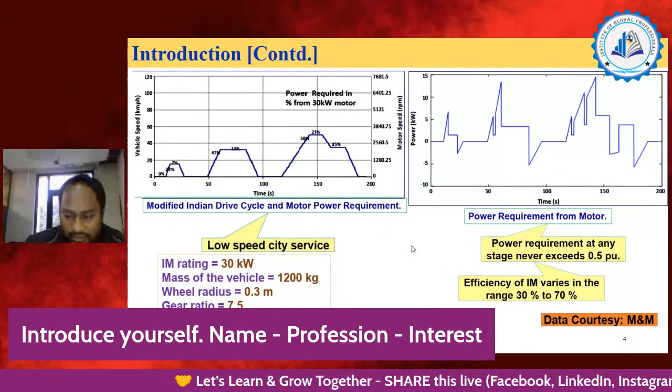All this data is practically analyzed from Mahindra Mahindra EVs. They have provided these graphs. So, induction motor, if operated at rated condition, will provide approximately 80 to 85% efficiency.

At maximum we can get 80 to 85% for a well-designed induction motor, and this efficiency will decrease when it's operated at derated condition or light load conditions. At that time, power factor is also very poor, approximately 0.1 to 0.4 in this range.

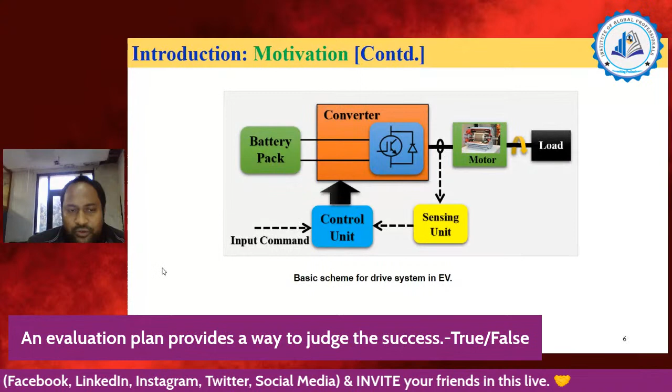For such cases, let's talk about the efficiency of a converter. The converter efficiency is about 95% to 98%. But let's say the machine is operated at rated load, then the efficiency of the induction motor is about 80 to 85%, with the motor also operating at rated speed. Then the overall efficiency of the whole drive system, we can observe, is about 70 to 75%. This is a pretty good overall efficiency of the drive system.

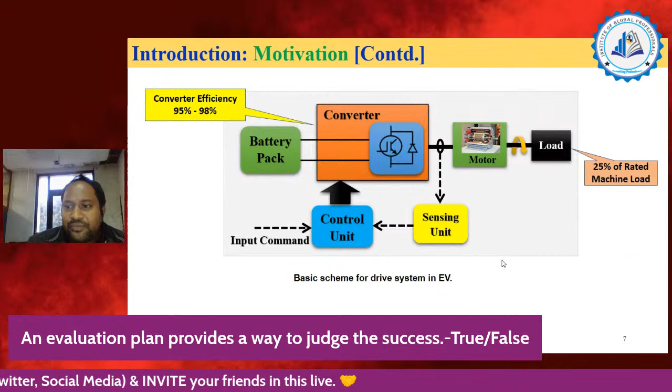But in the next scenario, now the motor is operated at 25% load, and speed also reduces to 25% of rated speed. In that condition, efficiency of the induction motor is 30 to 35%, and overall efficiency is about 25% to 28%. So this is very low overall efficiency that we achieve at low speed and low operating power conditions.

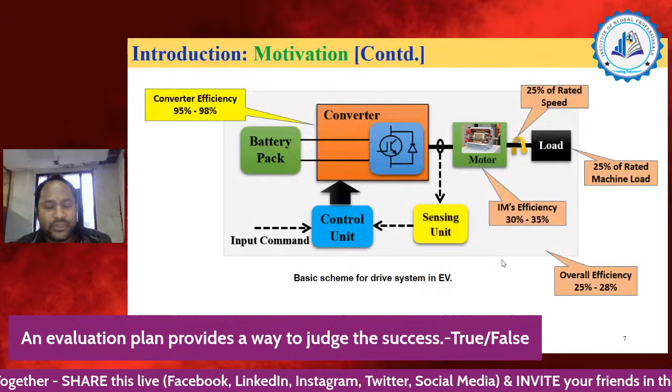So what we can see is that in that induction motor, core loss is the primary component responsible for poor efficiency of the overall drive system when operated at light load conditions. This hard reality demands efficiency improvement of such drives used for electric vehicle applications. This motivates us because if we improve the efficiency by even a very minor level, it will lead to a significant impact on global energy. If we improve efficiency by just 1%, that is enough for these cases. So this is the basic focal point of today's discussion.

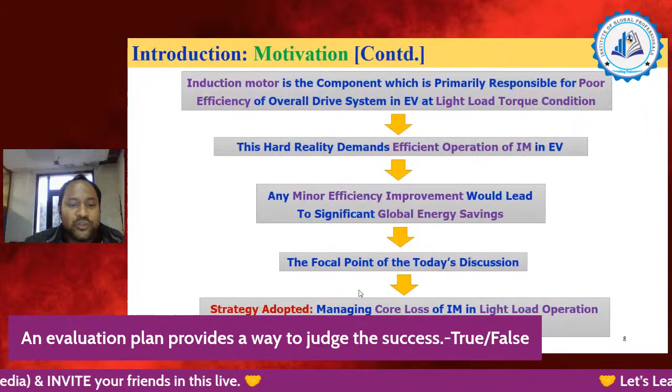So the strategy I am going to adopt to improve the efficiency of an induction motor is core loss minimization, by minimizing the core loss particularly at light load condition, by selecting the optimum flux of an induction motor.

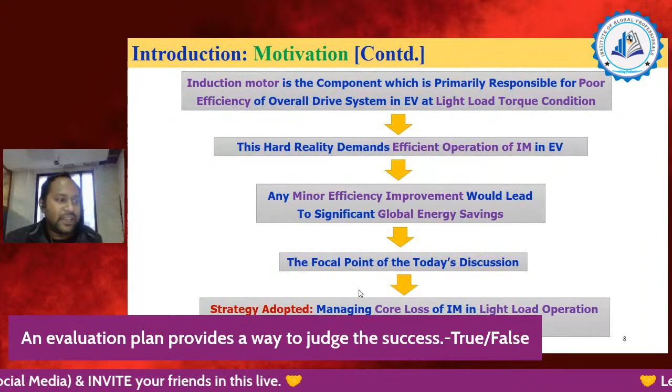So what we can say is that the average full load efficiency of a well-designed induction motor is 80 to 85%, and this degrades further when operated at light load condition. In fact, motors are subject to operating at light load condition for the majority of their service life. Besides, induction motors are also adapted in electric vehicles and hybrid electric vehicles nowadays. However, there are several advantages of induction motors, but their moderate efficiency puts a serious challenge for adaptation in EV and HEV applications over permanent magnet motors. In fact, battery usage to cater to losses becomes significant for induction motor drives.

This hard reality basically demands efficient operation of induction motor drives, and this is the focal point of the whole presentation. So I will primarily develop an efficiency optimization strategy for induction motor drives, which will offer high efficiency at light load conditions.

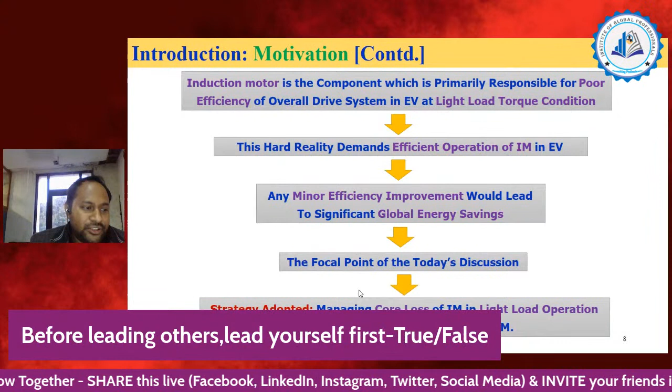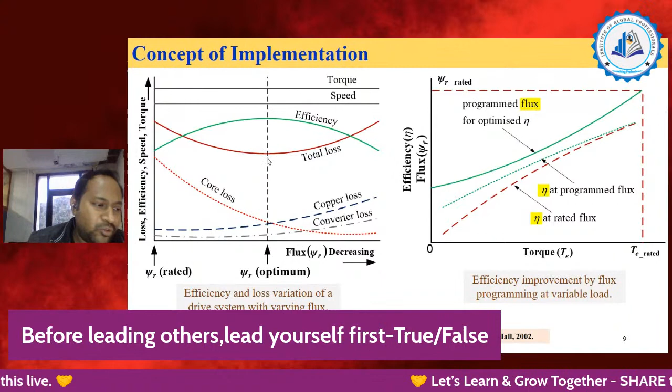So to get the maximum efficiency, the drive should operate at optimum flux corresponding to a particular load or loading condition. So here, if we reduce this flux, I observe that at this particular condition the overall losses reduce, meaning total losses of the machine get reduced, and at that time efficiency is improved and is maximum.

Now if I further reduce the core loss by reducing the flux further, we observe that total loss again increases and efficiency decreases. So we need to arrive at a particular point where the efficiency is maximum. That corresponds to the optimum flux point. So we need to achieve the optimum flux point so that we can get the maximum efficiency from the drive.

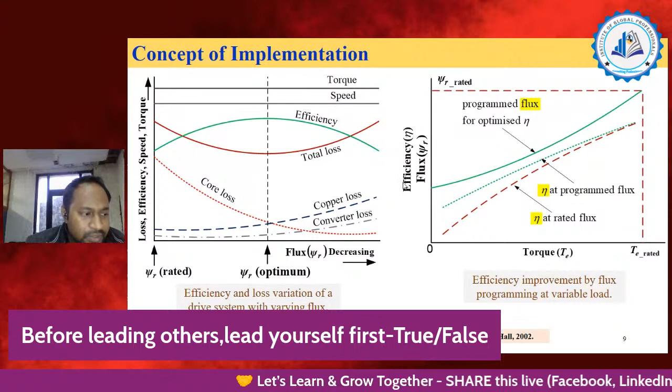The right side of the curve basically represents the torque versus efficiency and fluxes. This is the rated flux condition. What is the efficiency? At the rated flux condition, this is the efficiency.

As we know, as the load is increased, that means towards the rated condition, the efficiency is very high, and at low load or derated conditions the efficiency is very low.

So if I program my machine, or the flux, in such a way that we can program the flux, the machine is now operated at optimum flux condition at different loading conditions. This dotted green color curve shows the programmed flux. That means when the machine is operated at the optimum flux condition, we can achieve improved efficiency.

This is the significance of using efficiency optimization, or energy efficiency algorithm, for improving the efficiency of the induction motor drive. We can observe from this curve that at the optimum flux point, the efficiency is significantly improved.

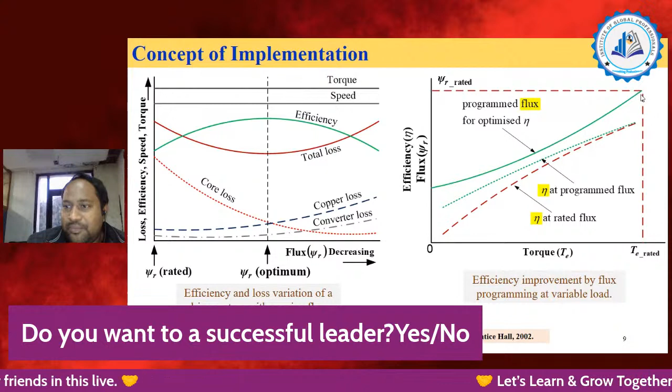So these are the background of efficiency optimization strategy. Different efficiency optimization strategies can be found in literature, and these can be categorized as offline strategy and online or real-time strategy. The real-time strategy is further classified as LMC, that is loss model control, SC, that is search control, and hybrid control.

Hybrid control is basically a combination of loss model control and search control. Both strategies are combined to make a hybrid technology.

This technique, LMC, is dependent on the machine parameters, because to calculate the machine loss it uses machine parameters like stator resistance, rotor resistance, inductance, and other parameters, and speed as well.

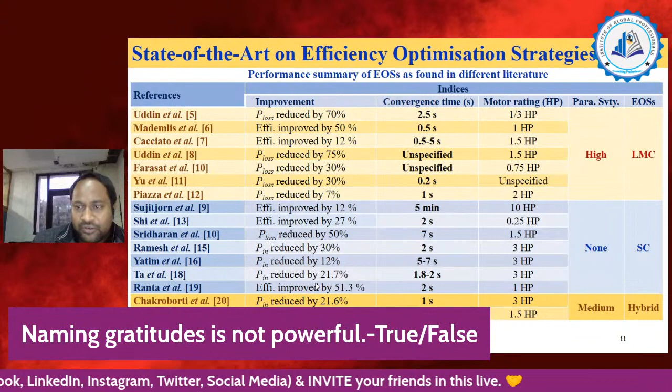So, what are the scope and challenges for the implementation of the efficiency optimization scheme? These are a few issues based on the literature survey. Among the different issues we have found, EOS, efficiency optimization strategy, is quite complex for implementation.

So this is the technique I implemented in induction motor drive to improve the efficiency of induction motor drive. Here I have used a modified adaptive quadratic interpolation technique. This is a mathematical tool to improve the efficiency. The quadratic interpolation is a very useful and efficient method for solving the optimization problem.

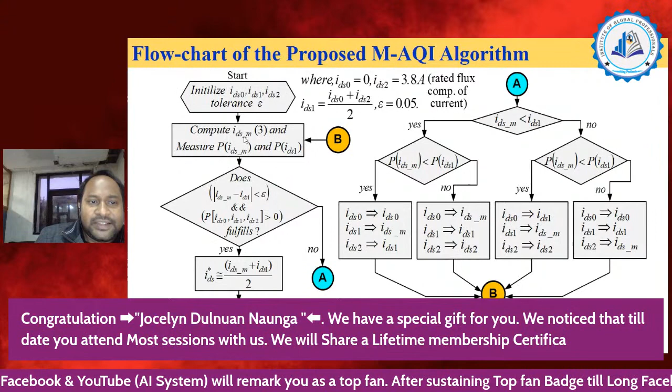So we have initial 3 points: IDS 0, IDS 1, and IDS 2, and I take a tolerance limit, that is epsilon is 0.05. Going back to the previous slide, if IDS M and IDS 1 lie within this tolerance limit or tolerance band, 0.05, then we can say we reach the optimum value. So we will compute first the IDS M using the equation shown in the previous slide, from which we can compute the value of IDS M.

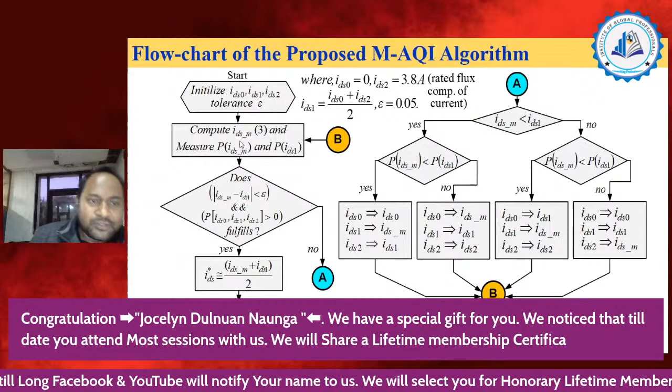So we will also measure the minimum value and the input power of the machine. That means what is the input power for that particular flux condition, and what is the input power at the rated condition or previous cases.

Initially the machine was operated at rated condition, represented by IDS2, and the minimum flux condition is represented here. The power at the minimum flux condition is represented by PIDSM.

So basically we will measure power at different instances and compare these two powers, checking whether the power is going in the lower direction or towards the upper direction. If power reduces, that means towards the minimization direction, then it's fine. If power increases upward, then we need to again compute the flux value.

So we will start like that and check whether these differences lie within the tolerance limit, and whether the sufficient condition is fulfilled. If fulfilled, that means the second derivative of that particular polynomial curve is greater than 0, positive, then we can stop the iteration. If it's not fulfilled, then again we move for the iteration.

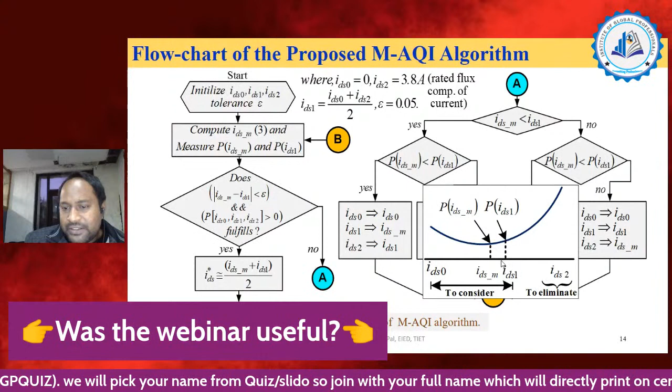I will take one example. Let's say this is a particular case where IDS0 is the minimum value on this side, IDS2 is here, IDS1 is here, and IDSM is here. So here we can observe a particular case: I have considered these two cases where the flux value IDSM is less than IDS1, and the corresponding functional value PIDSM is also less than PIDS1.

So in this case, this is also true. From the curve it can be observed these two conditions are fulfilled, so this curve looks something like that. We will eliminate this part, from IDS1 to IDS2, this part of the curve will be eliminated, and we will focus from IDS0 to IDS1 in this particular area.

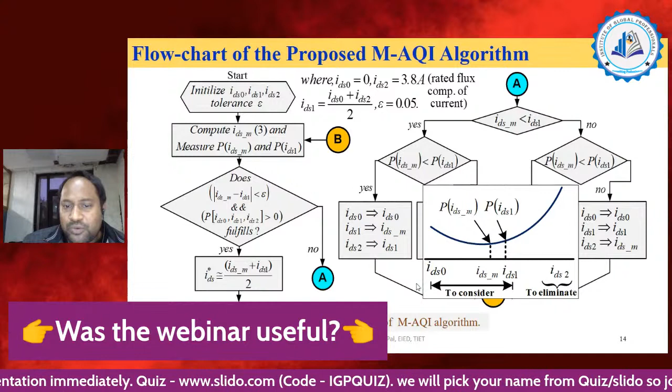Because in this area the minimum value will lie, we will modify these values IDS0, IDS1 and IDS2 with this information, and we will continue these iterations until they fulfill these conditions.

So basically what happens in the line search technique: the initial interval is given and we run the adaptive quadratic interpolation, and at each iteration the interval size reduces. That means we eliminate a portion of the curve or portion of the interval in each iteration, and the optimum step of interval should be very small, so that it is accepted and we can say we get the minimum value. So this is the whole thing.

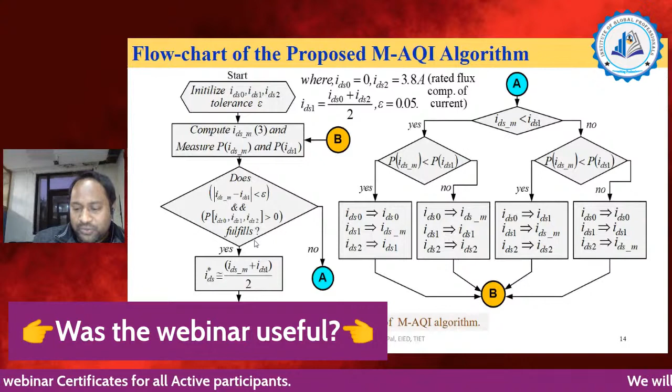This was developed in MATLAB, and I have implemented it in an induction motor drive, and I will show the scheme of the induction motor drive here.

So this is the whole scheme, the field-oriented control scheme of induction motor drive with efficiency optimization strategy for EV applications, electric vehicle applications.

A typical indirect field-oriented control of induction motor drive used in EV is shown in this block diagram form. The squirrel cage induction motor is fed by a voltage source inverter, that is VSI, and the control scheme is developed in synchronously rotating reference frame with two current sensors, IA and IB, used to sense the line currents.

The efficiency optimization strategy is implemented in the flux loop of the field-oriented control structure, and it decides the value of the flux component of current, which we use for further processing of the scheme.

So basically this efficiency optimization strategy is integrated in the flux loop to decide the optimum value of the flux component of current based on the input power requirement.

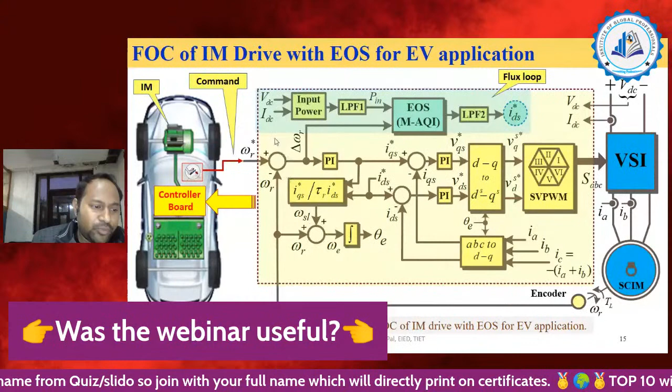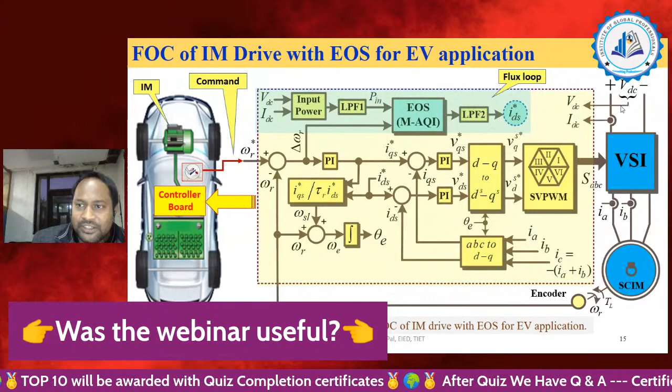So we can measure the input power from this converter input, that is the voltage at the converter, VDC, and current, IDC. So whatever the input of this converter, we can measure this and get the input power of the converter, and that I am going to use for implementation of this efficiency optimization strategy.

And here another feedback is coming, that is delta omega r, the speed difference of reference speed and feedback speed. This del omega r is the speed difference that also needs to be fed back for this efficiency optimization strategy, and this is required for when there is a speed change in the induction motor.

In the machine there is a speed change. So when there is a speed change and this difference is very large, the efficiency optimization strategy will decide to set only the rated flux. At that particular transient moment, the machine will operate at rated flux conditions. Once the machine goes into steady state, the efficiency optimization strategy is automatically applied to the machine.

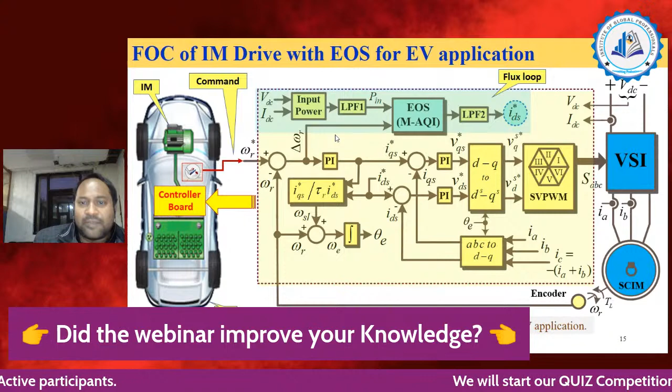So that's why we need this speed information. Let's say for these cases, when the speed difference lies within 1 radian per second, then we can say the machine is in steady state. Now we can apply the efficiency optimization strategy, and this strategy will automatically apply - we need not worry about application of this scheme. It is an automatic application process.

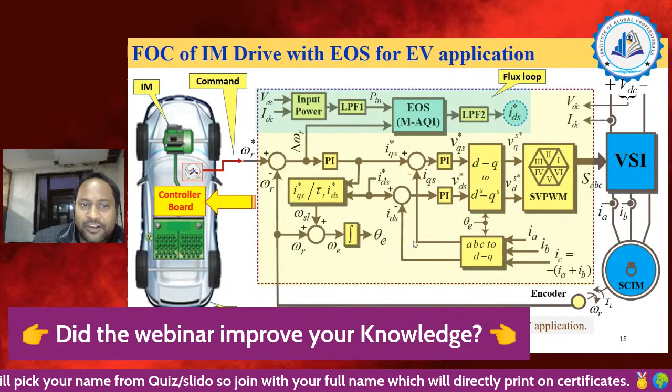So in this way, this will continue, and it will search for the minimum input power requirement corresponding to the optimum flux. And when it is the optimum value of the flux, the machine input will be minimum, and that gives the minimum losses of the machine, hence efficiency of the machine will improve. In that particular case we can say efficiency is maximum.

So here we can see an encoder is used for speed measurement purpose, and this is actually closed loop operation of the induction motor drive. This scheme is developed in MATLAB Simulink, and later it is implemented in hardware as well.

So here I can show the machine parameters. What are the machine parameters and controller parameters that we have used in this scheme? The induction motor we use is a 2.2 kilowatt induction motor. Its rated torque is 14 Newton meter. These are the voltage rating and frequency level. Number of poles is 4, and these are the other parameters - magnetizing inductance, stator and rotor inductance, stator rotor resistances, rotor inertia, and all these things.

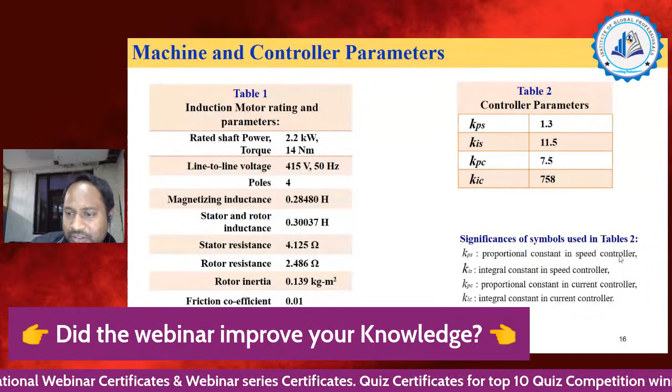And these are the controller parameters, basically PI controller, what I have used for these cases in implementing this field oriented control. So these PI control values are shown over here. KPS is speed control, and KIC represents the current integral control. So these are symbolically represented over here.

So now we'll focus on some results. These results are obtained from MATLAB simulations, and let's say a drive is operated at particular conditions. I have already mentioned that the induction motor's efficiency is poor when it's operated at light load conditions. So here all the results are presented at light load conditions, and we'll see how much efficiency is improved in these cases.

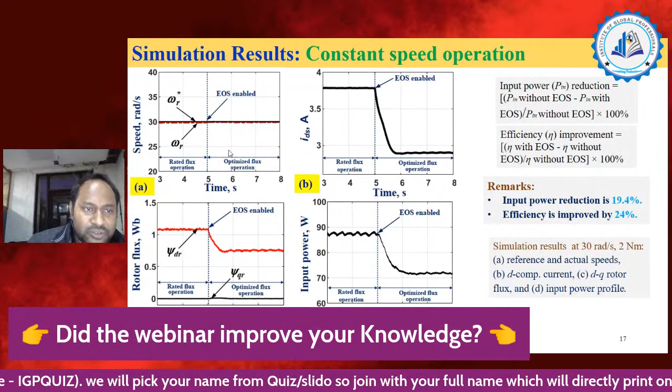Let's say for the first 5 seconds it's operated at rated flux condition, and at 5 seconds I have enforced the efficiency optimization strategy at this point. So after 5 seconds it shows the machine operated at optimized flux conditions. What would be the rotor flux, stator flux, stator current, and input power - these are shown in the other curves B, C, and D. So figure A makes it quite clear that the speed tracking performance is quite nice and smooth.

Throughout the operations, figure B shows the flux component of stator current. Initially during rated operation, the flux value is 3.8. When efficiency optimization is enabled, the flux component of current gets reduced and settles at an optimized value.

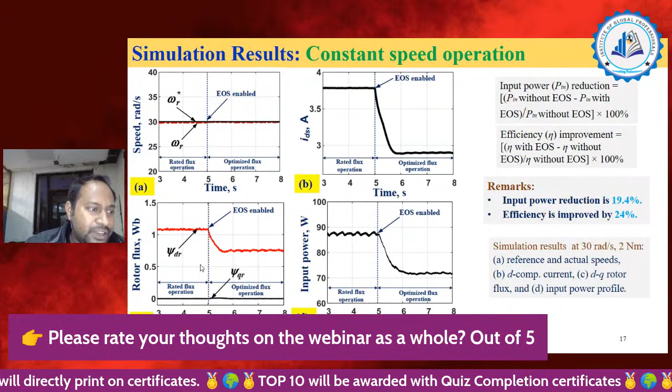It shows the corresponding rotor flux and input power as well. Figure C demonstrates the rotor flux, and here the rotor flux orientation is perfect throughout the operations. As the flux component of current is reduced, the flux also gets reduced. Once the flux gets reduced, the machine input power gets reduced.

This was the input power before the optimization algorithm is activated. Once the optimization algorithm is activated at 5 seconds, the flux gets reduced, therefore the input power also gets reduced and settles at a low value. So here we can achieve input power reduction of about 19.4%, and efficiency is improved by 24%.

So this is one result, for a constant speed operation of an induction motor drive, which is used in EV. These basically show that flux reduces and the corresponding input power reduces as well.

The second simulation result I'm going to show is the vehicle drive cycle. This is one modified Indian vehicle drive cycle. Figure A shows the speed tracking performance, and figure B shows the corresponding input power.

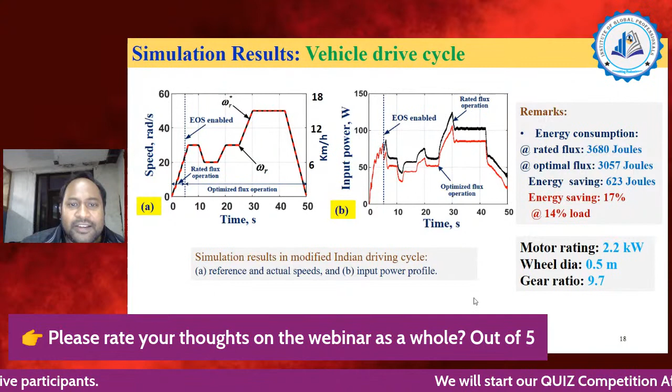So here we can observe from this analysis the efficiency saving - that means energy saving is 17% for say 45 seconds of duration. We have an energy saving of 17%, and this is a good saving for only 45 seconds.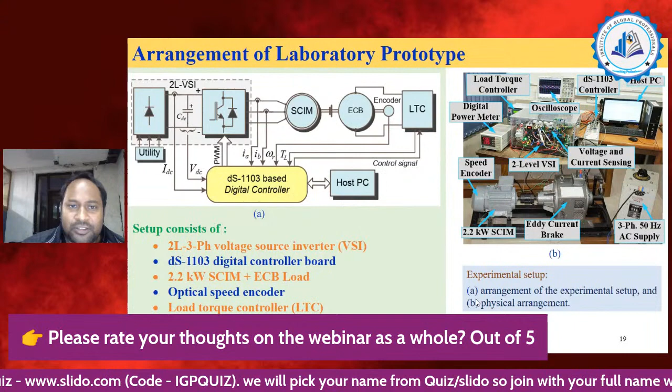Now, I have tried to implement all these things in a hardware setup as well, for validation of the scheme. So whatever we studied in MATLAB, I implemented on a real-time basis. Here's a brief discussion of the hardware setup developed in the laboratory, shown here.

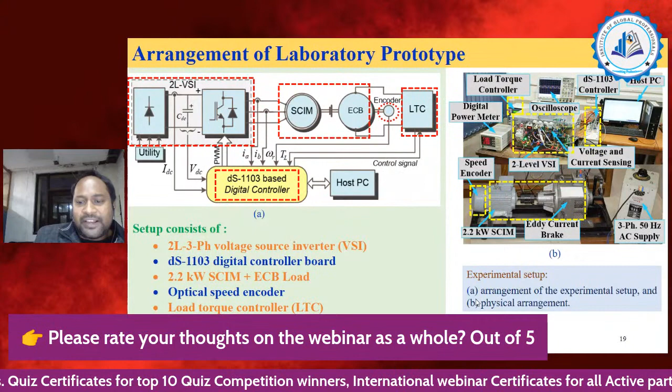This setup is developed in laboratory and consists of a two-level voltage source inverter, a DS1103 digital controller, and a 2.2 kilowatt induction motor with eddy current brake load. Figure A shows the schematic diagram, and figure B shows the physical arrangement of the laboratory prototype.

One of the major components of the setup is the voltage source inverter. This voltage source inverter has a power circuit card, gate driver card, and signal conditioning card. There is a current sensor and voltage sensor, all inside this two-level voltage source inverter module.

This module is designed and fabricated in the laboratory specially for the validation of this work, and we emphasized cost effectiveness. I will show different parts of this voltage source inverter one by one in the later slides.

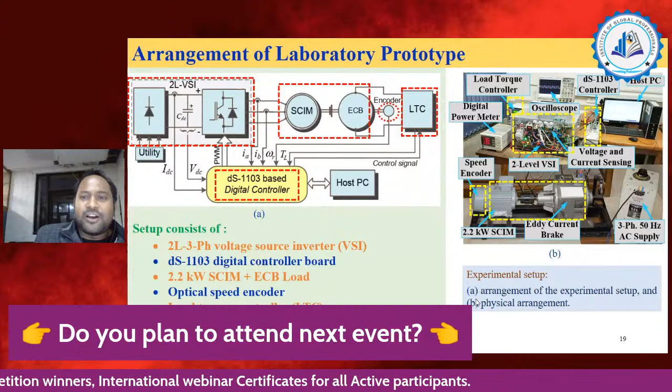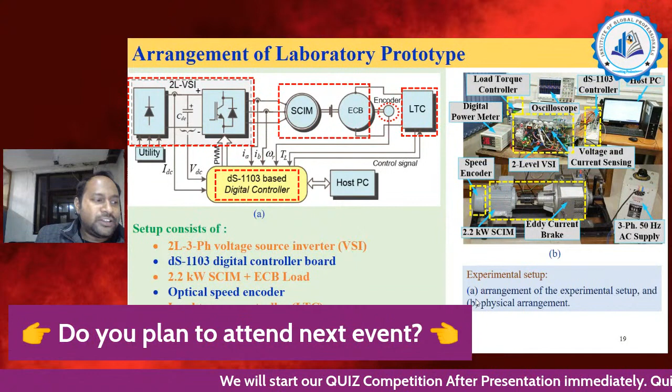All the PCBs are designed with the help of Proteus software, that is Proteus 8.9, and manufactured by JLC PCB, a Chinese company. We just upload the Gerber files, and they manufacture and send it to us. The total PCB cost is around 200 US dollars, and all the components I have fabricated in the lab.

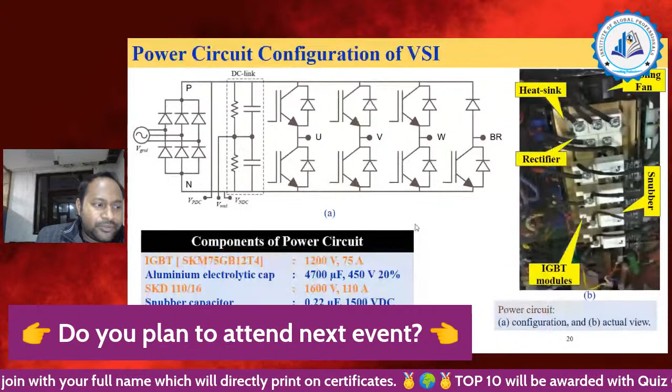So this is the power circuit of the voltage source inverter. Here a dual half bridge IGBT module is used to construct the power circuit. Four such modules are used, and one module is used for the brake chopper in these cases.

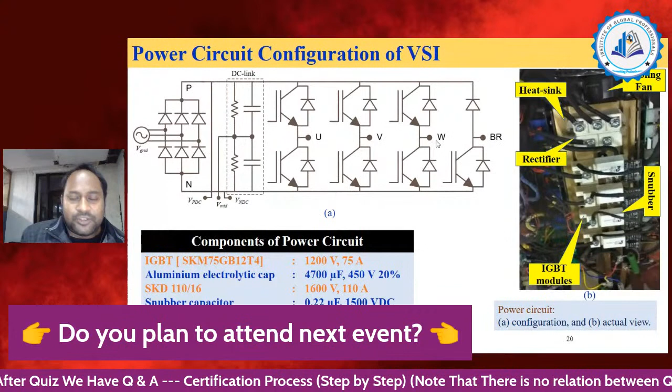And three legs are used for the inverter, and one is used for braking chopper. So these are the power circuit configuration. This is the physical view.

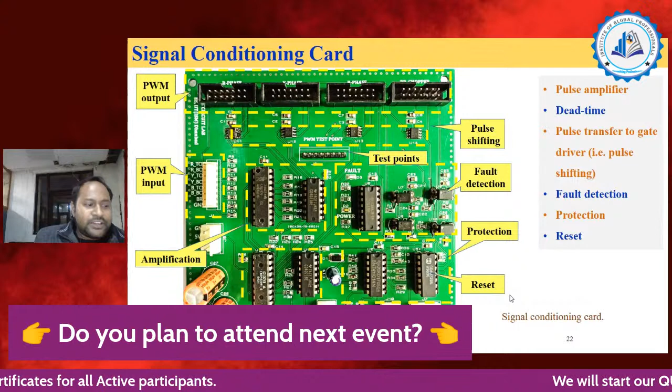This is the signal conditioning card. Its primary function is amplification of pulse and pulse shifting. The input pulse is coming from the DS1103 digital controller board, and it's fed to the gate driver circuit of the inverter.

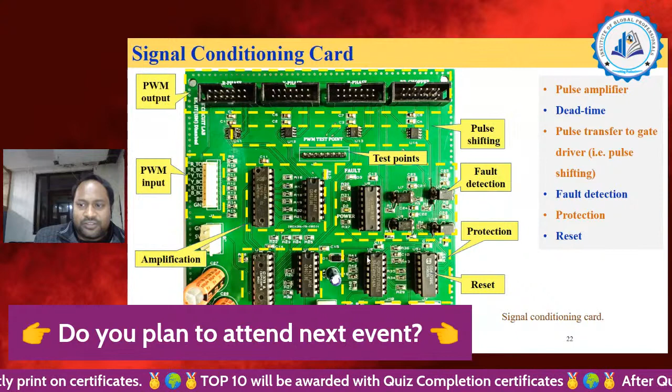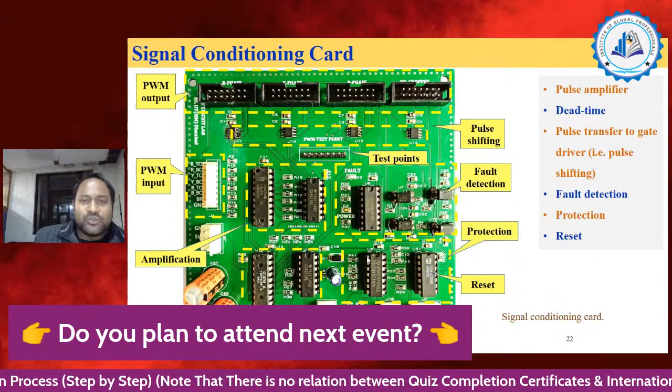This card is also designed in laboratory. Here we have facilitated with the dead-time, and we incorporated different protections in this card. We have the fault detection scheme as well, and if there is any fault in the inverter, it will automatically shut down the inverter by stopping the input pulse. So all these things are developed in the laboratory.

This voltage and current sensor card is also fabricated in laboratory. The current sensor card uses LA55P, and the voltage sensor card uses LV25P. Current range is up to 50 ampere, and voltage range we can measure up to 1000 volt. So these are the ranges of these cards.

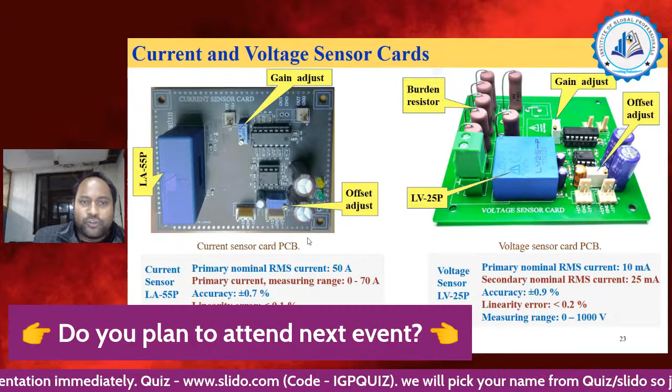This card is used for measuring the current. The sensor card measures phase current of each phase of inverter output, that is motor input current, as well as DC link current. Similarly, the voltage sensor card is used to measure the pole voltages as well as the DC link voltages of the machine and inverter.

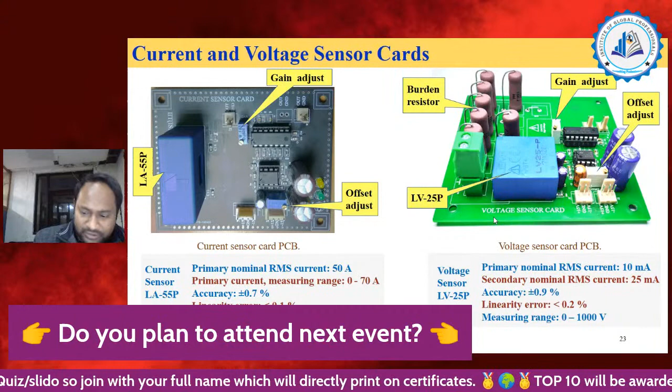With the help of the setup, we have some experimental results as well. We have tested the machine at the similar condition shown in simulation, to study whether the scheme performs well or whether there is any noise or issues. So we tested in the similar environment, same condition, same speed pattern, same load torque condition.

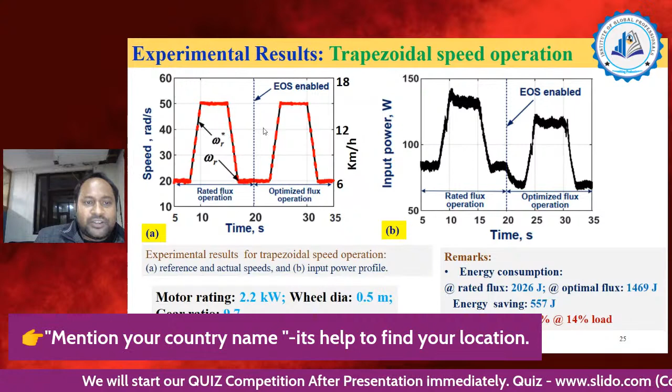Here we can observe for the first 20 seconds the machine operated at rated flux conditions, and for the later 20 seconds the machine operated at efficiency optimization strategy. If we look at the speed response, the reference speed and actual speed, that is motor speed which we got from the motor encoders, both speeds match and the speed response is fine.

Before enabling the optimization algorithm and after enforcing it, there is no change in the speed pattern. But we can observe the input power gets reduced when we enable or enforce the optimization strategy.

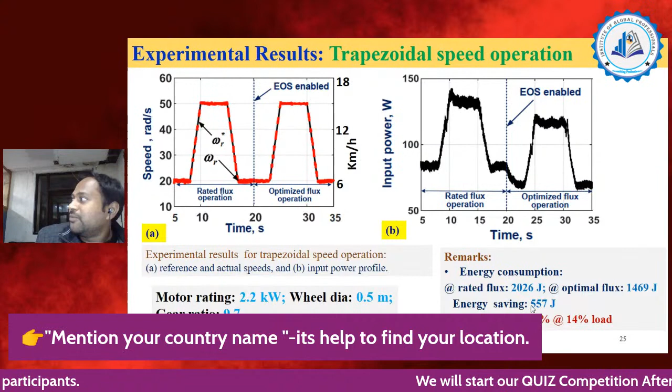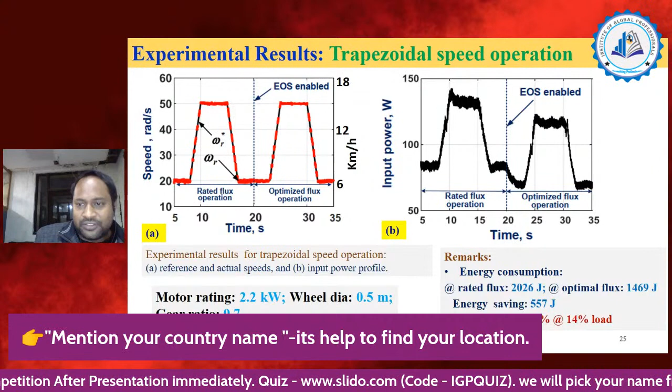So after 20 seconds, we enable the optimization strategy, where we can see a reduction of input power, from 2026 joule to 1469 joules. So there is an energy saving of 557 joules, which in percentage is 27%. This is quite a significant improvement we have achieved.

This is the motor gear ratio and the motor rating, wheel diameter, and vehicle speed as shown here. Again, we have tested this machine at different operating conditions, different speed patterns, different loading conditions, and a few results I have shown in this table.

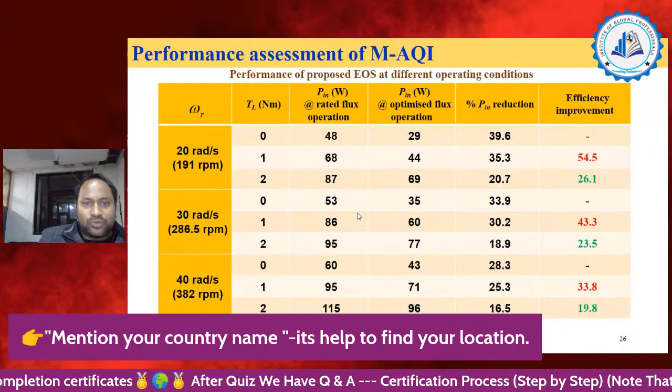So when the machine rotates at a particular speed, say 20 radian, that is 191 rpm, at different speeds, when torque is 0, and torque is say 1 Newton meter and 2 Newton meter.

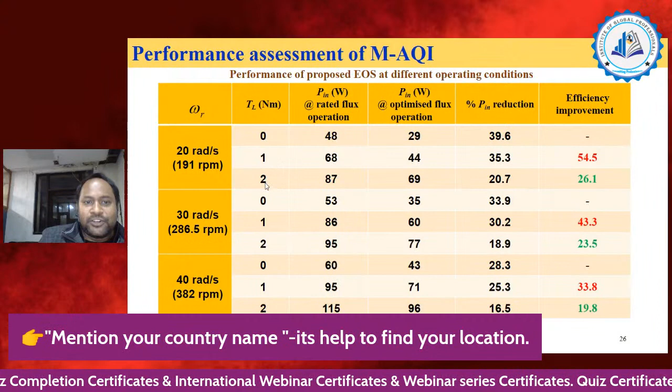So this is the input power requirement when it's operated at rated flux, and when it's operated at optimized flux condition. Input power is represented in watts. So there is a significant reduction of input power when used in optimized flux condition. In percentage value, it's 39.6%.

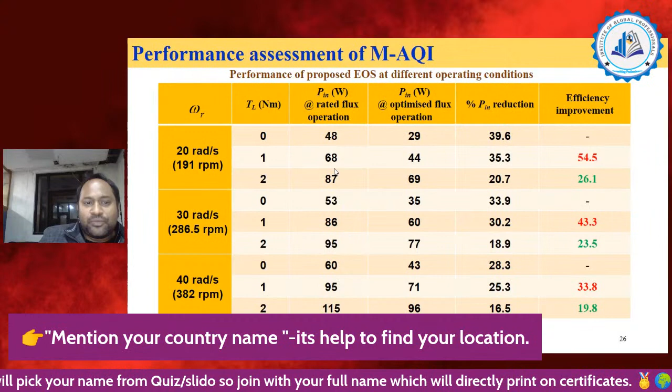Efficiency cannot be calculated because output power is 0, and when the machine is operated at 1 newton meter, that means 7% of rated load, then efficiency improvement is 55% almost, that is 54.5%.

And when machine is operated at 14% of the rated load, that is 2 newton meter, then it's 26.1%. So as speed is increased and load is increased, this amount of efficiency improvement is achieved. At low speed, 40 radian is okay, we can consider as low speed, and at that point we can achieve 19.8, almost 20% of efficiency improvement.

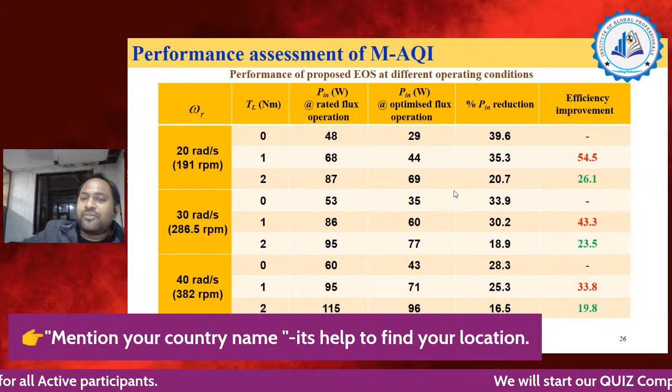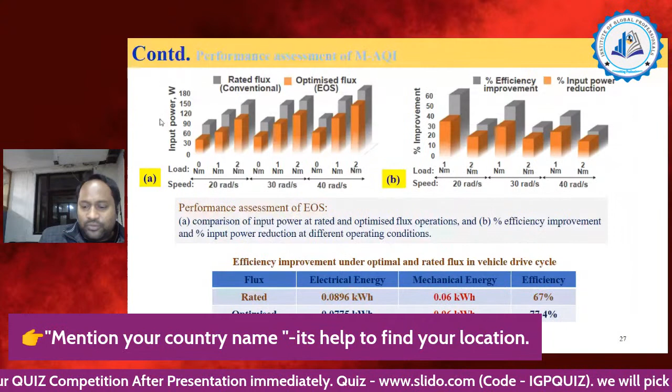So all these data are real time data, that means we observe from hardware setup. And this data is plotted in graphical manner for better visualization purpose.

Figure A shows the input power and its corresponding values. The input power for rated flux condition is shown in this color, and the orange color basically shows the optimized flux condition input power.

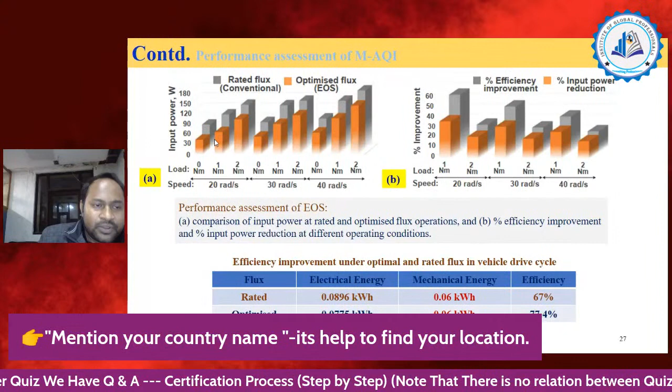At different speed patterns and different loading conditions, this is the input power requirement for rated flux and corresponding cases, that means same power loading condition, same speeds. This is the optimized flux condition input power requirement.

So here this is the optimized flux condition. From this figure, it is observed that when machine is operated in optimized flux condition, input power is significantly reduced. This can be observed at different speed and different loading condition.

Similarly, Figure B shows the percentage improvement in terms of efficiency and input power reduction. So at 1 Newton meter, 20 radian per second, efficiency improvement is about that much, and input power reduction is that much. It shows different loading condition and different speed pattern.

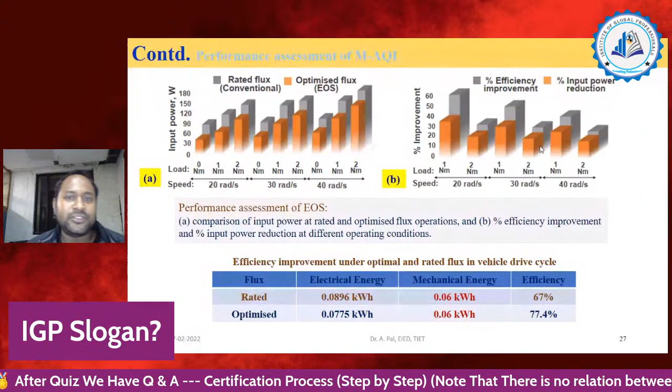So these are the characteristics we can observe from the machines. Basically what I am telling is that from this curve, if we enable this efficiency optimization strategy and implement it in induction motor drive used for EV applications, there would be a significant amount of energy savings.

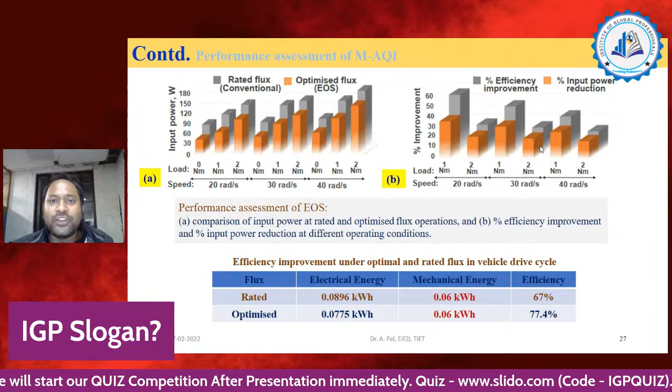Once we save some energy, that means we can drive that vehicle for longer ranges. So this efficiency optimization strategy will improve the driving range of electric vehicles. That is the significance of this present work and the efficiency optimization strategy.

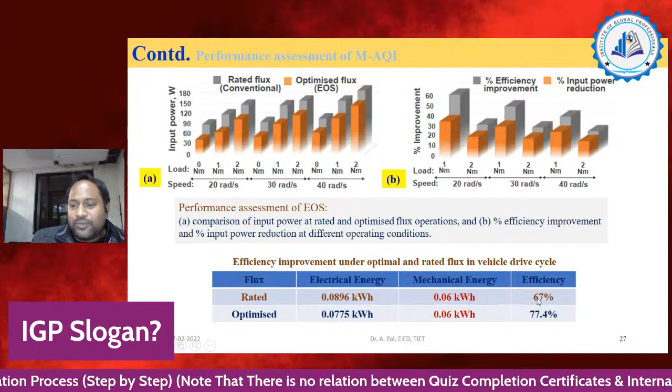Again, here in table format, some data is present. At rated condition, that means rated flux condition, this is the electrical energy consumption and mechanical output is that much. Efficiency at that particular case, when machine is operated to provide such output, is 67%. When we enable the optimization strategy, electrical energy gets reduced while mechanical output still delivers the same power.

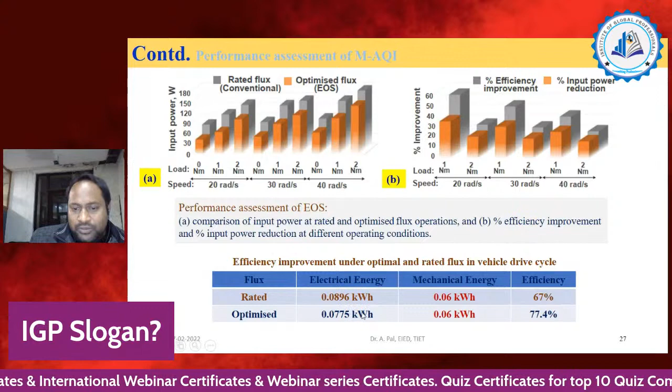And efficiency is improved by some percentage. Now its efficiency is 77.4%. That is the analysis from the data we have observed from the results.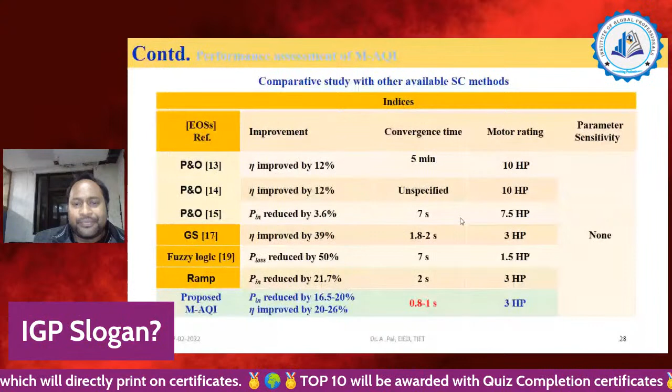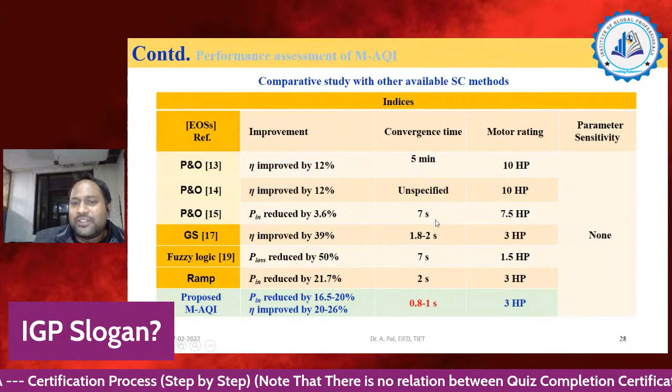So this type of method we cannot apply in EVs, though this method can be applicable in industry where the drive is operated at a particular load for longer times.

There is significance of this method in case of industry, but if we're talking about electric vehicles, then this method is not applicable, is not significant at all.

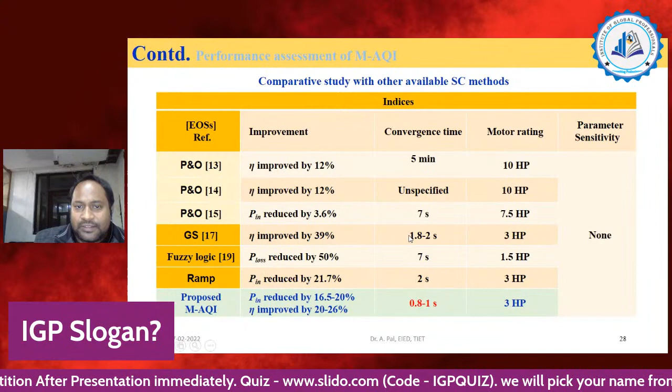The other method proposed in other papers is GS, golden section method. This is a quite interesting method, also a line search technique. Here the efficiency improvement is about 39%, and the convergence time is drastically reduced from 7 seconds to 2 seconds almost.

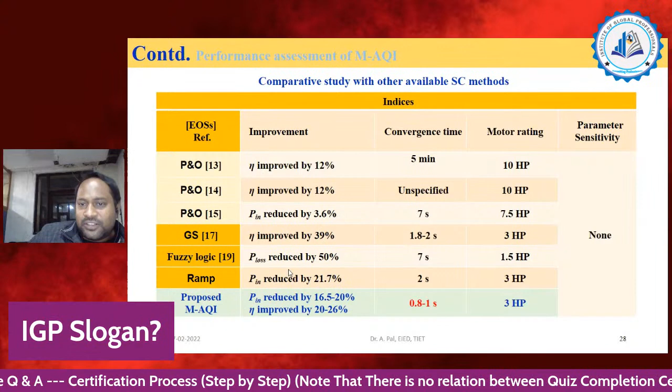What I have observed in what we have implemented is that the quadratic interpolation method's convergence time is around, maximum, 0.8 to 1 second, and in other cases it may be less than that. So we consider this method is faster compared to other methods available in literature right now, and the efficiency improvement is 20 to 26% almost, with input power reduction about this percent.

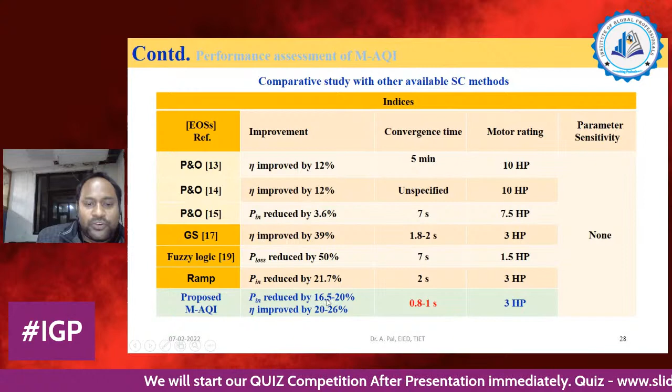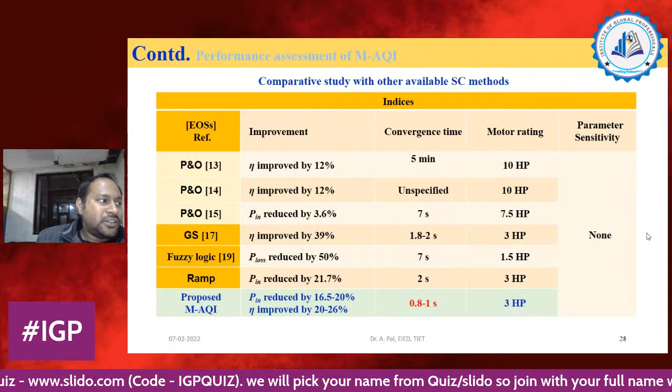All these methods are basically search control methods, and this method does not require machine parameters, so it is a parameter insensitive method. So these can be implemented in vehicles, and this method gives quite accurate results for finding out the optimum value of flux.

Coming to the conclusion part, what we have observed is that average efficiency improvement at light load condition is about 20 to 26%, and that is the achievement, I can say. This efficiency optimization is employed in the flux loop to get the optimum flux. Therefore, we need not modify the hardware setup or have any extra hardware requirement.

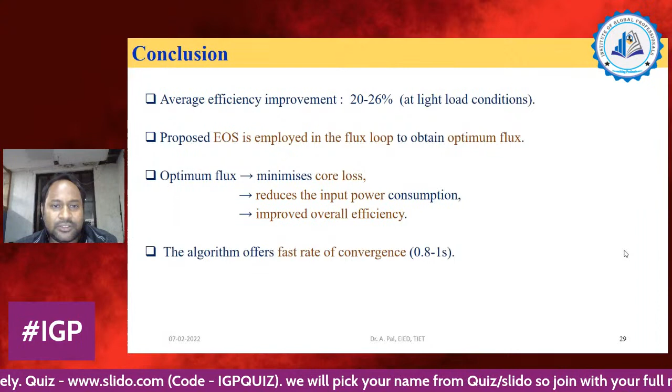There is no requirement of any hardware circuitry. We simply modify the control algorithm, so it can be easily implemented in industry or electric vehicles. This control algorithm is very simple, very mathematics oriented, and implementation is quite easy.

Basically, we want to achieve the optimum flux where the machine losses are reduced. The core losses are minimized, and consequently, the input power consumption gets reduced, and overall efficiency is improved on the entire system.

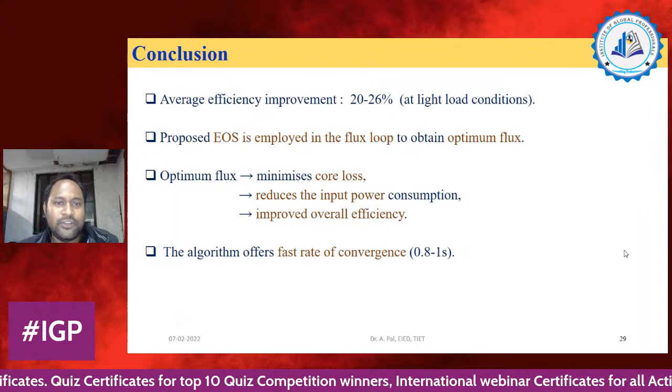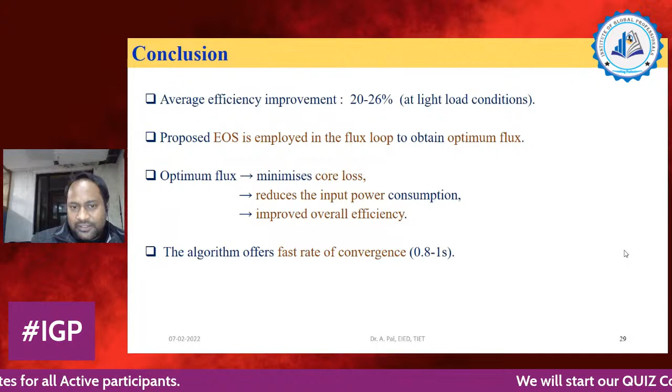The convergence rate of this algorithm is 0.8 to 1 second, which is quite fast compared to other methods available in the literature. So these are the things that we can implement in electric vehicles to improve driving range, especially induction motor driven electric vehicles.